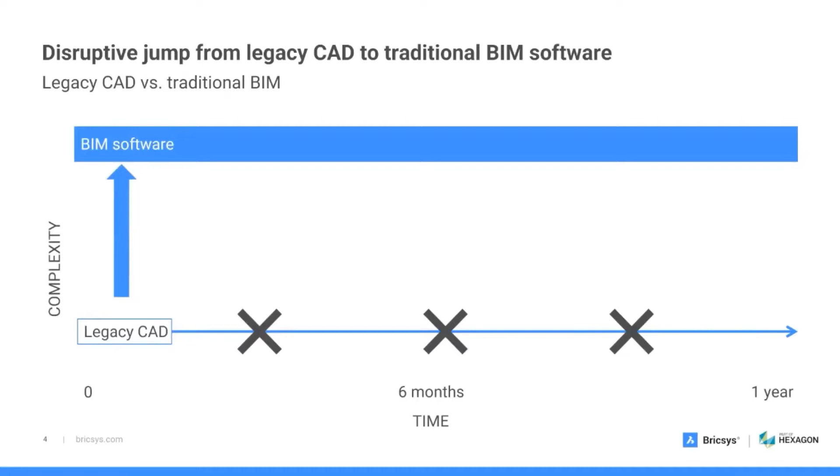So, moving from CAD to a traditional BIM software is quite a disruptive process. So, BIM is a very different system than CAD, so it requires a full 100% conversion. So, all CAD licenses will have to be abandoned, but also all CAD data like template files and so on, built up by the users over many years, will all be lost. So they all have to be recreated manually in the BIM environment.

And since BIM, like these traditional BIM software, is very different from 2D CAD, it often takes 6 to 12 months to truly master it.

So in the meantime, they lose productivity in the first 6 months while everyone is trying to make the transition. And we often see that companies then quit in an early stage, but then all investment costs are lost, and then they fall back to CAD.

And that's quite a shame, because as we will show later on in our demo together with Vrex, BIM workflows can really help to detect problems early in the design phase and avoid problems later on during the construction phase. But then we have to offer those companies an easier transition to BIM so that they can do it at

their own pace and without losing productivity during this transition. And that's what we do with BricsCAD. So in our BricsCAD portfolio, 2D, 3D, and BIM are in the same CAD system and can be used together. So you can reuse all your CAD data

and avoid this drop in productivity. And companies can then gradually make the transition from 2D to 3D and BIM and more advanced workflows based on that, so at their own pace. So you get more productivity step by step, without having this disruption to your productivity.

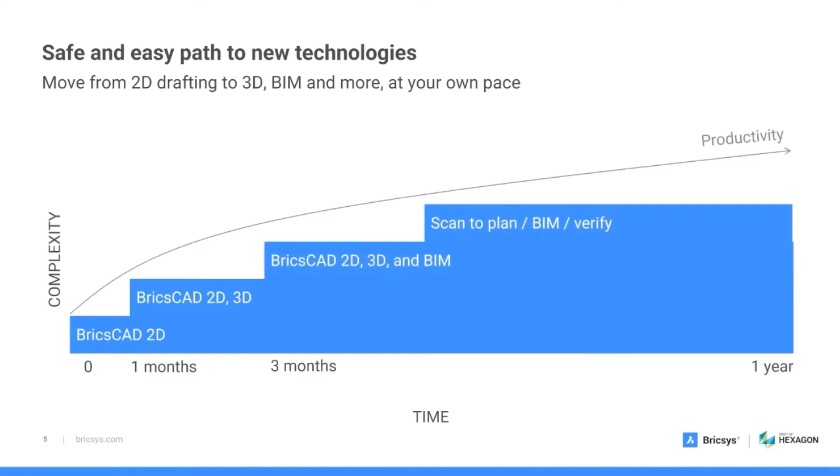Now, a full overview of what BricsCAD BIM is capable of would, of course, take us way too far. So I would like to focus on how we approach design, coordination, and openBIM.

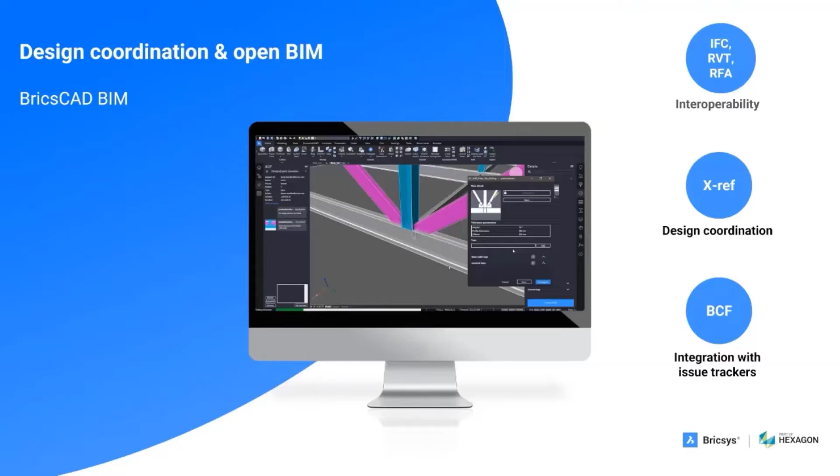Now, openBIM and vendor-neutral collaboration have been at the center of the BricsCAD philosophy from the very beginning. So Bricsys, as you might know, is a founding member of ODA, which is the Open Design Alliance, which has enabled the use of this industry standard DWG file format across different authoring tools.

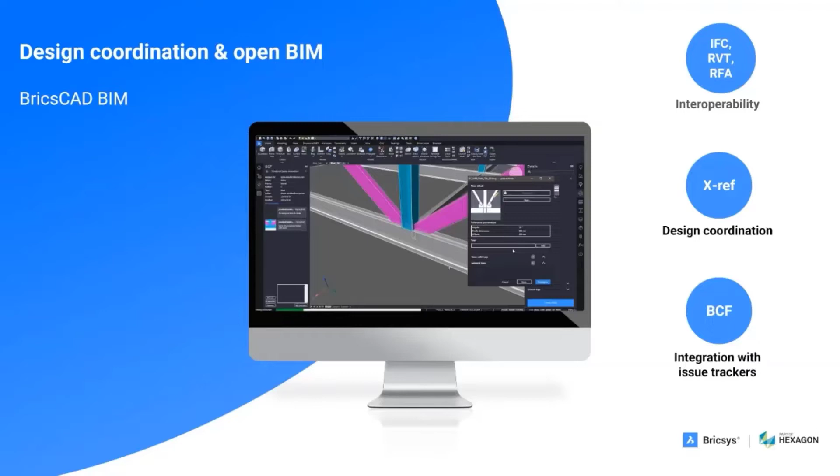But on top of that, we also offer IFC import, export. We offer RVT import, RFA import. We also natively support BCF.

And we have implemented openBIM quite differently than many other tools. So here are the openBIM design principles that we've used while implementing openBIM. So first of all, we align our design workflow to the openBIM principles from the very start.

So for us, IFC is more than just this export that you do at the end. Our internal data and classification structure is fully aligned to the IFC structure from the very beginning when you start modeling in BricsCAD BIM.

Some still see IFC as this static format for archiving or referencing projects, but we see IFC really as a building model exchange standard. So you should be able to work with IFC models the way you work with natively created models.

We automate as much as possible, so openBIM should not be a hassle. And with our AI machine learning tools, you can automatically classify your building elements according to the IFC classification structure.

And finally, so we offer natively this BCF support. So we have a built-in BCF panel.

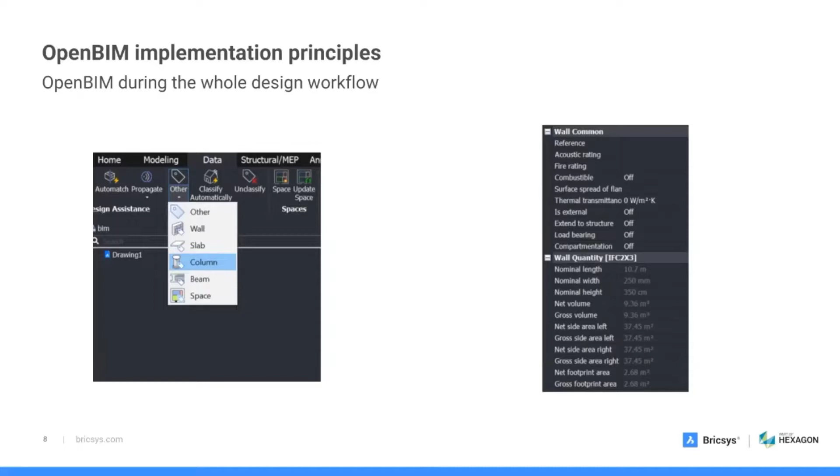So what you see in BricsCAD is what you get in IFC.

So again, IFC is still often used just as a reference or for coordination, like an architecture model that is used as a reference for an MEP model or for clash detection and so on. But we want to make it possible to use IFC for design transfer as well.

And we make that possible with our IFC import. So when importing an IFC model, all elements are imported as native BricsCAD BIM entities, which has, of course, many advantages. So you can just continue designing, adding data, using all the automation tools that are available in BricsCAD BIM, generate construction documentation, and so on.

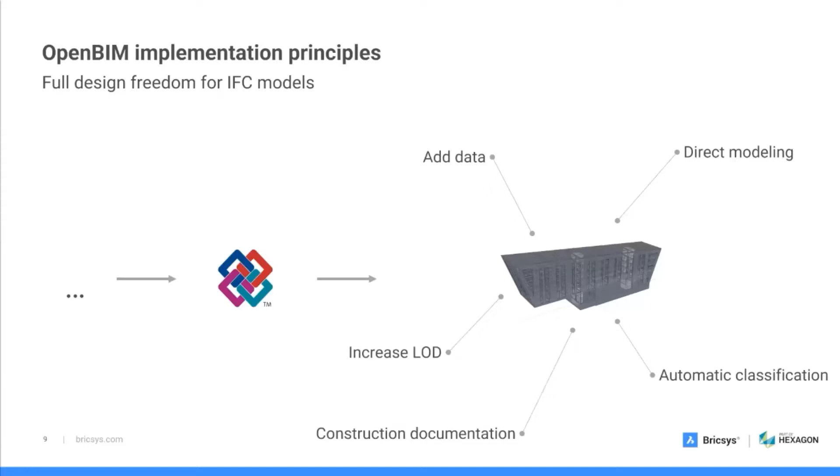BCF, as most of you know, is the openBIM format for exchanging issues and communicating with other project team members. Now we offer BCF support built in, so we have a BCF panel inside BricsCAD BIM, in which you can read BCF files, but also directly connect with the API to cloud BCF services like BIMsync, BIMtrack, BIMcollab, without needing to install any plugins for these specific platforms.

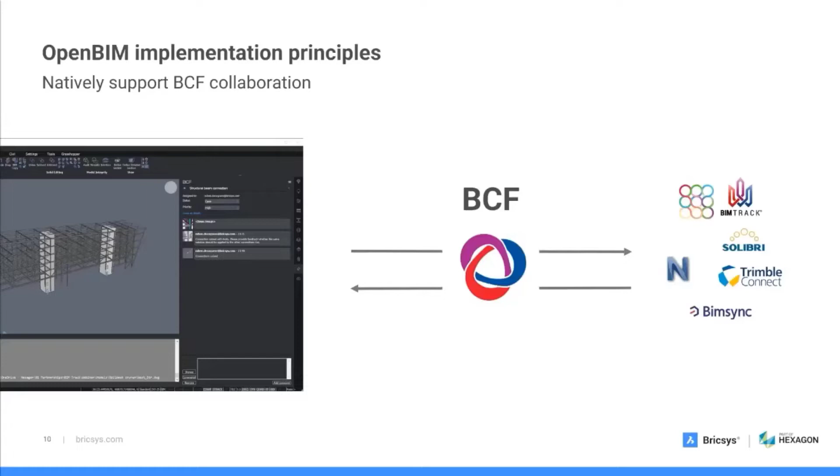Our focus on openBIM is paying off, and today you will clearly see that in the demo later on, where we show the integration with Vrex. The whole workflow is fully based on openBIM, using IFC and BCF standards to integrate with the Vrex Virtual Reality platform. The model created in BricsCAD BIM gets exported easily to IFC and imported in Vrex. Then in Vrex, you can create BCF issues and either transfer them to BricsCAD as a BCF file and open them in the BCF panel, or use the BCF API and connect to one of the BCF services like BIMtrack, BIMcollab, and so on. Investing in this openBIM support really pays off to easily integrate with a tool like Vrex.

Okay, I will now pass over to Rune and Chris from Vrex.

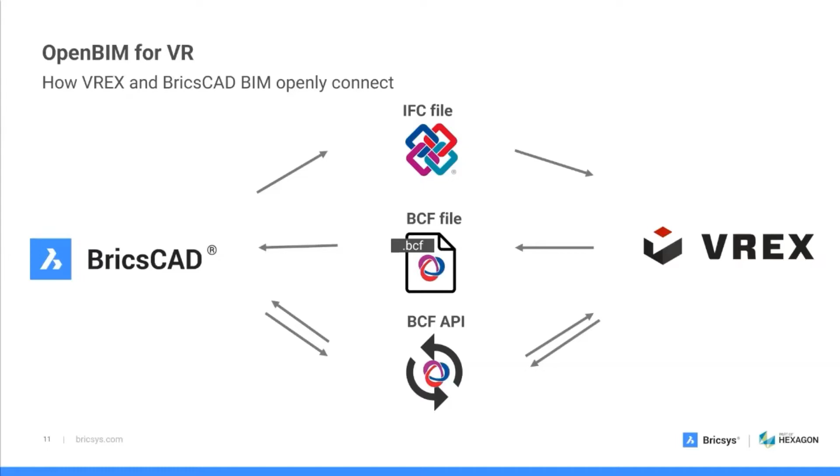Before we head over to VR, we want to give you a bit of background information about Vrex. Vrex is used throughout the world and is supported in multiple languages. Our headquarters is in Norway, and we have partners throughout the world to support our customers. Our customers range from building owners, designers, consulting teams, as well as contractors. Vrex is used on projects of all sizes and all types, including commercial, government, and industrial sectors of the construction industry.

Our core mission at Vrex is to allow all project stakeholders to step into the 3D model. Everyone can experience BIM together, live, and at the same time, either in VR or by watching on our desktop viewer on their computers. Vrex enables you to resolve complex issues as a team and prevent costly rework downstream.

Using the IFC and BCF, or BIM Collaboration Format, buildingSMART and openBIM has enabled Vrex and BricsCAD to seamlessly exchange models and issues together. In addition to BIM, laser scanning and reviewing point clouds for as-built conditions is becoming common practice on projects. Vrex allows stakeholders that can't go out to the job site to overlay and visualize point cloud scans together with BIM in a life-size environment.

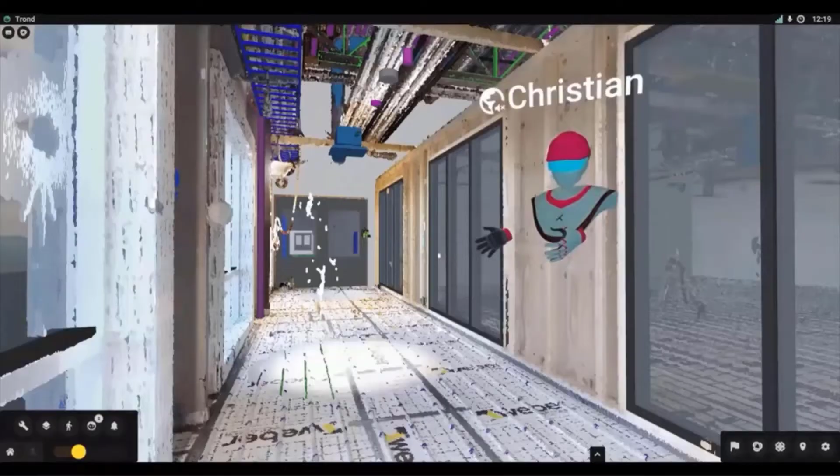Alright, so now Rune and I are going to go ahead and put on our VR headsets and do a live demonstration of Vrex. We're going to be reviewing the project at the same time, but Rune is going to be in Norway and I am in the United States.

All right, so Rune, we're both here in VR. Would you mind coming over onto this side? Basically what I'm going to do is show you something here related to this cantilever. See this, basically this side of the building is cantilevering over with no underlying support. So I want to take a look at the structural for this.

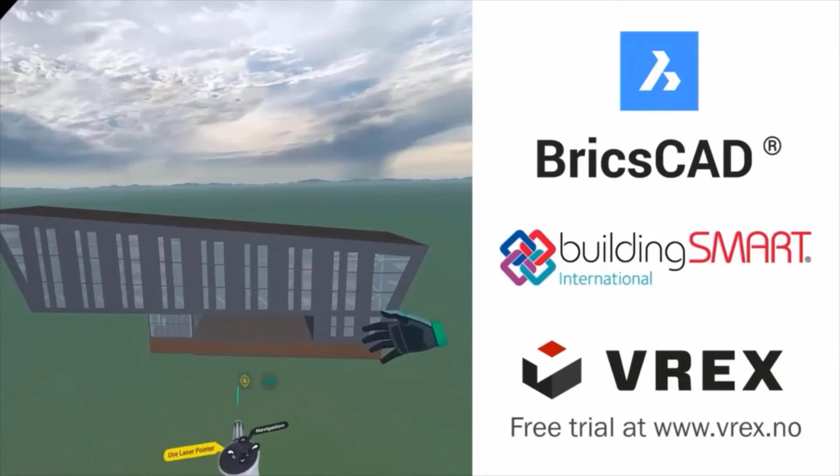Yep, exactly, that spot right there. So I'm going to turn off the architectural, and now we're looking at the structural, and I can actually see that there's a truss system here that the engineer has done. So what I need to do is, let me go to red lines. We just need to basically talk with the engineer and then the construction team about how they're going to actually fabricate and splice those trusses.

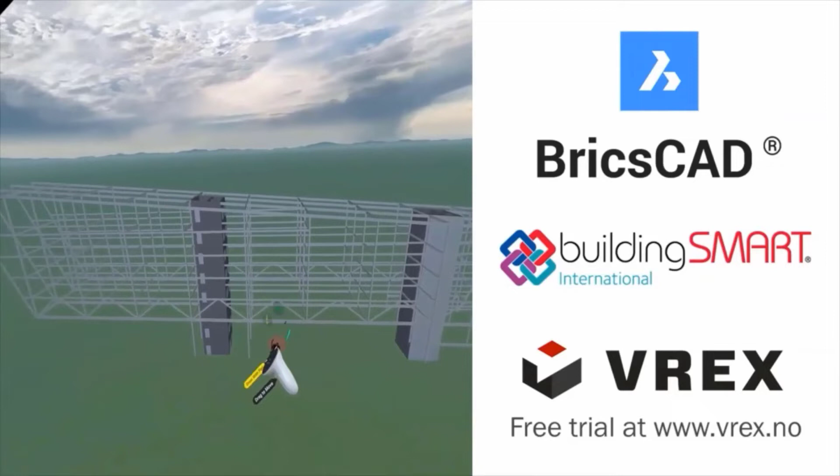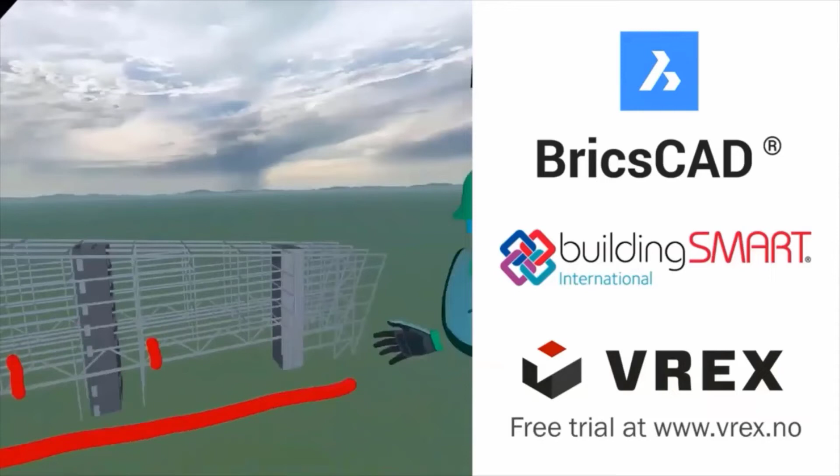And I feel like we're going to need to do construction essentially in this direction here, so that way we have a lot of the back span structural steel basically in place. Then we just need to figure out where essentially the trusses are going to be spliced, and where we're going to have our cranes. We'll need to talk about and see what sort of space there is on site for crawler cranes versus tower cranes. And then we'll just need to evaluate the pick for the cranes, and see if we need two cranes to lift the truss pieces or not.

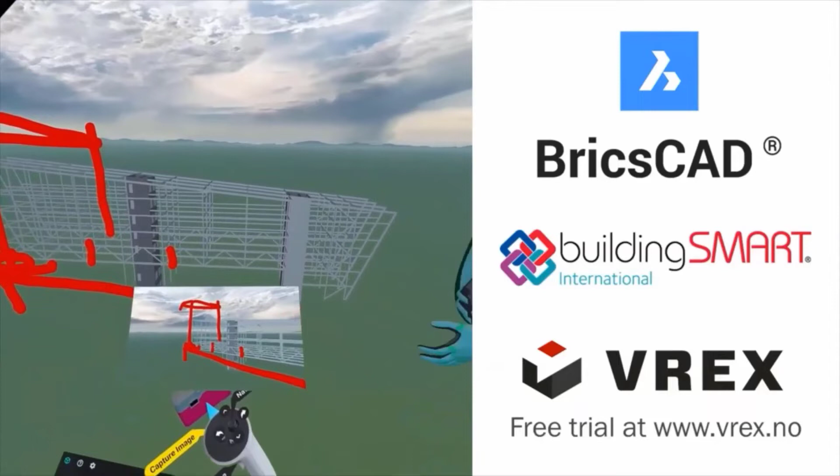And then basically look at how that core is going to be done in the middle there. So let me take a picture. Then I'll schedule a meeting with the construction team so we can take a look at this and talk about it a little bit further. And then let's just clear out the red lines, turn the model back on. I'm going to go ahead and go into one-to-one mode here, or full life-size mode.

Yep, I see you there.

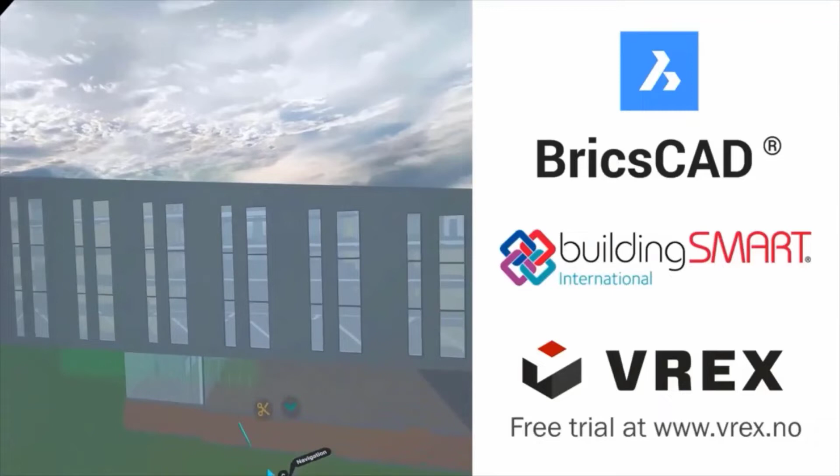All right, so now what I'm going to do is explain building sections using clipping. What's great about this is if I click on a surface here on the building, and navigate forward to get a little closer, I can hold down the trigger and move this clipping plane, and here I basically have a 3D building section of my project.

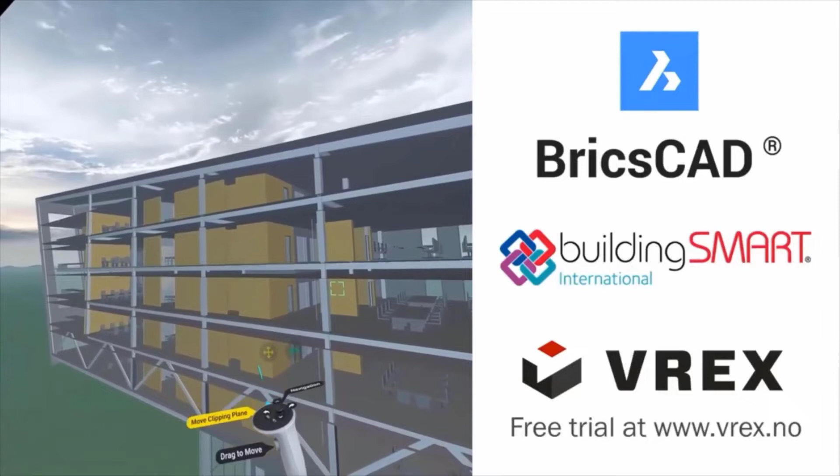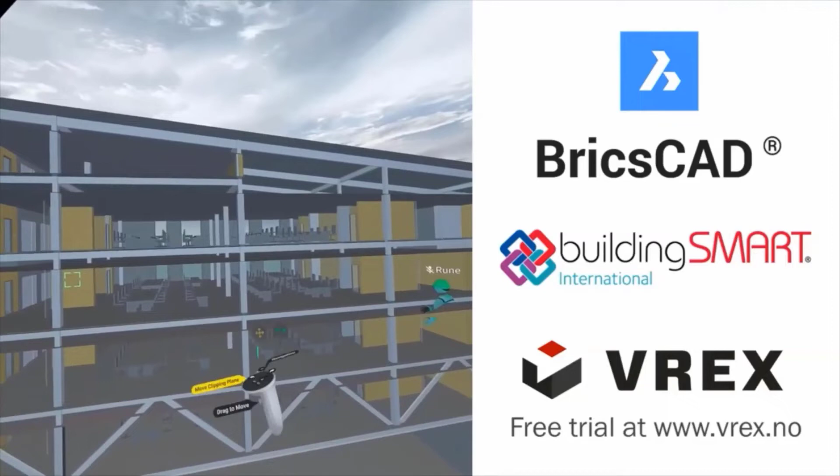You'll see on architectural drawings building sections are often cut at different locations to give you a map of the interior of the building. Here in VR, this is accentuated to another level. I can really see how each of the building systems work from floor to floor, especially with MEP shafts and where things transfer from floor to floor. I can see the consistency and layout from one area to another, and how the structural fits in the ceiling space. So it takes building sections to another level.

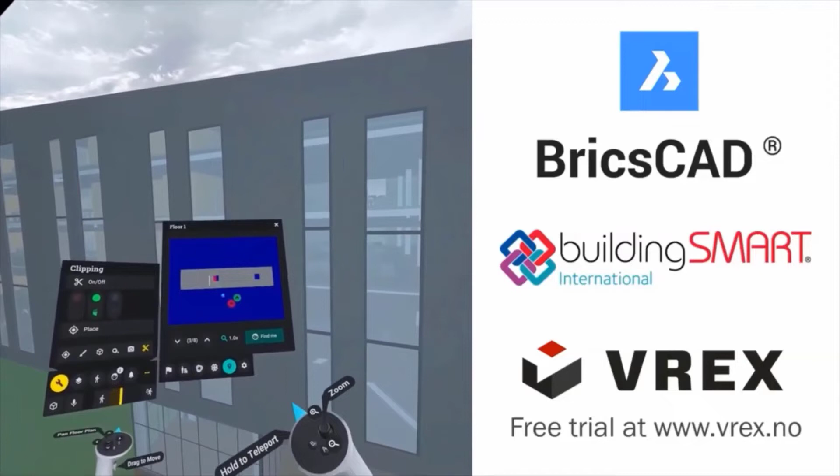I'm going to go ahead and remove the clipping plane. What we can also do is go to the floor plans. This is another way for us to navigate. You can see where Rune and I are here with our icons in the site plan, and we can just go floor to floor. Let's say here on floor number 3, I'll just click us into the building.

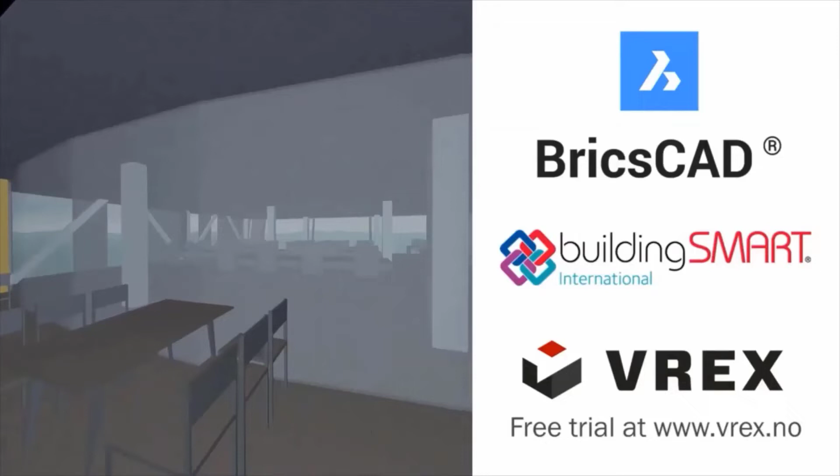Okay, so now we're teleported onto the 3rd floor, and we're life size. I can get a full feel and experience the model. I can actually just walk over here.

The first thing I want to take a look at is how this structural is lined up with the architectural space. This feels a bit tight to me, and looking at this from a headroom clearance and safety point of view, I want to make sure the architect and the owner are good with this. I'm going to go ahead and walk through here.

So Rune, does this look a bit tight right here? Do I look tight in this space when I'm walking through it? Yeah, it looks like you're walking through a slightly narrow door. Okay.

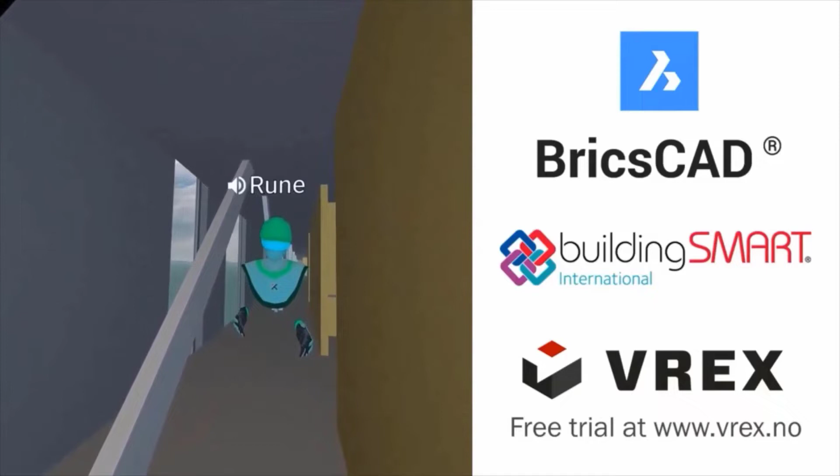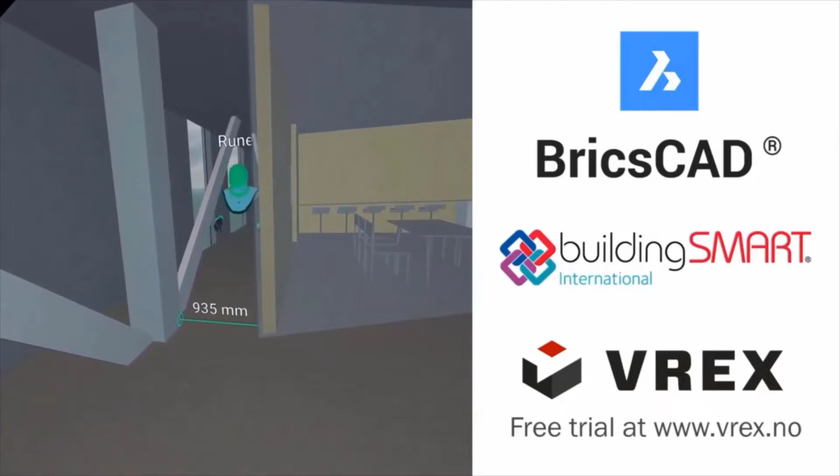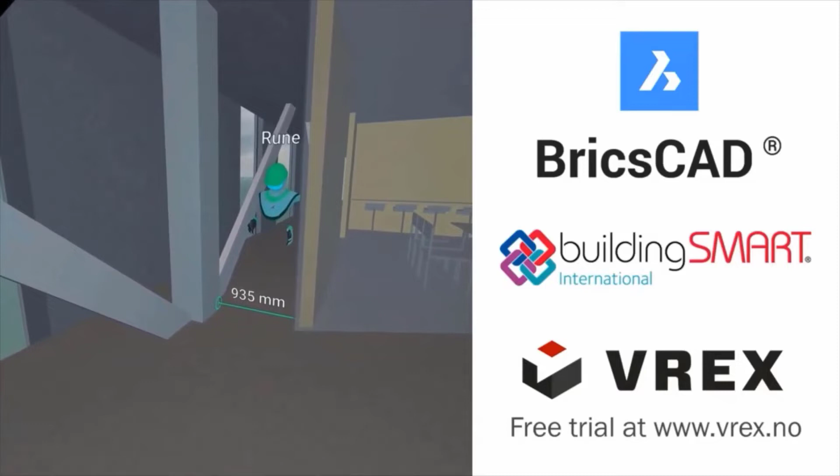Would you mind taking a measurement of that real quick? Okay, so it's a little bit under a meter there, from the clear face on the wall. I want to go ahead and talk with the owner and the architect. We'll get on a session with them and review this, and maybe we'll make an issue out of this later to verify.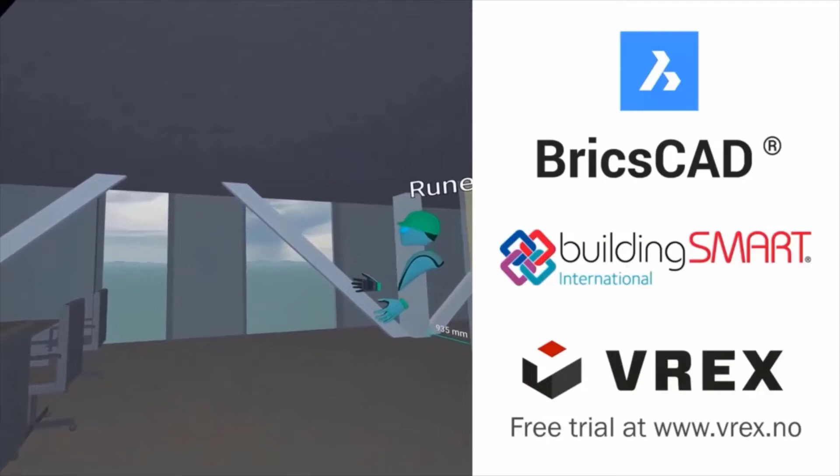This is a really good example on this level here. Just walking over to the middle of the space so I can get a feel for it. This level is a bit unique because we've got these truss web members or bracing members, and I'm looking at how this affects, exactly where you were pointing there, and how that impacts the visibility out the windows.

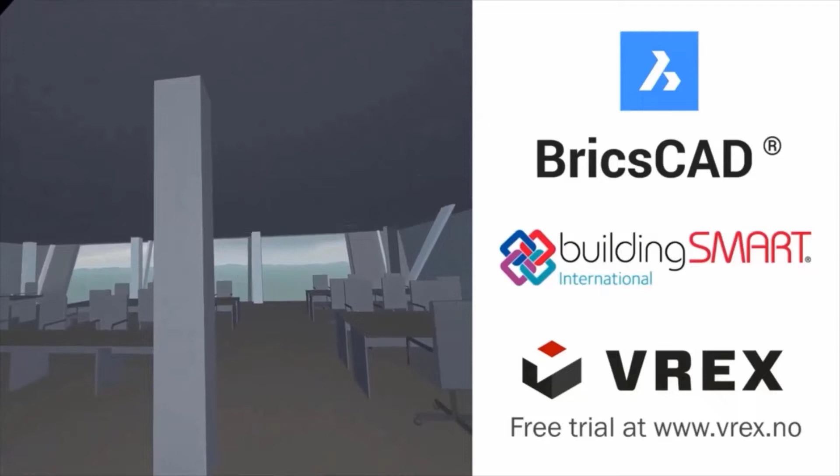I'm also looking at the column placement here relative to the window panels, and making sure that's all nice and symmetrical between the window manufacturer and the structural, so that it aesthetically looks good. It'll probably be good to bring the architect and the engineer into this space and make sure everything from a visibility point of view and safety protocol is all good.

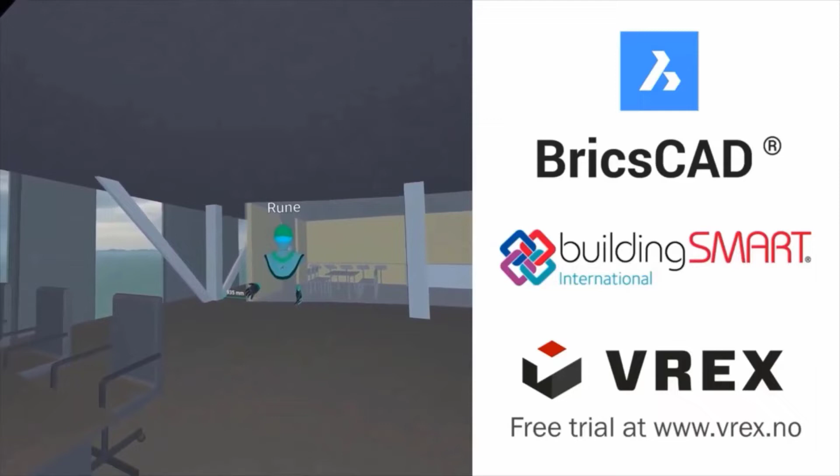Did you say you had some issues down in the basement related to MEP that you wanted to show me? Do you mind taking us down there? Yeah, I'll open that up.

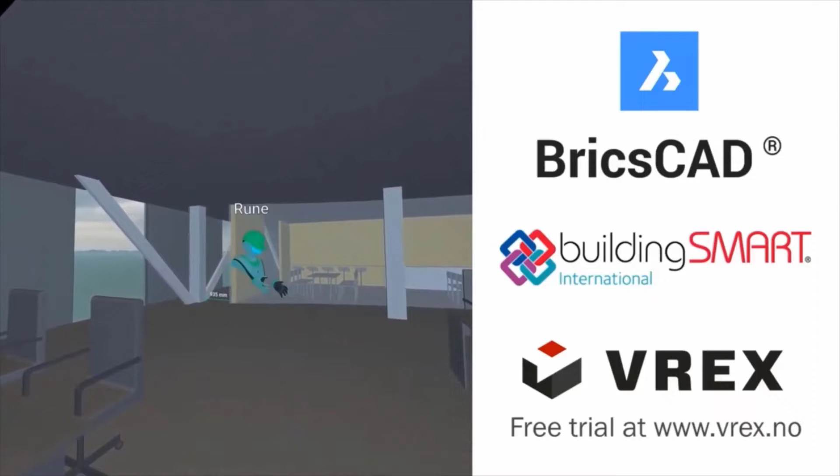Yeah, so I want to go over a couple of issues down here. One of them is the water pipes. Looks like they're trying to turn to avoid the ventilation, but they're turning a bit too early. So I want to make a note of that and bring it back to the modelers.

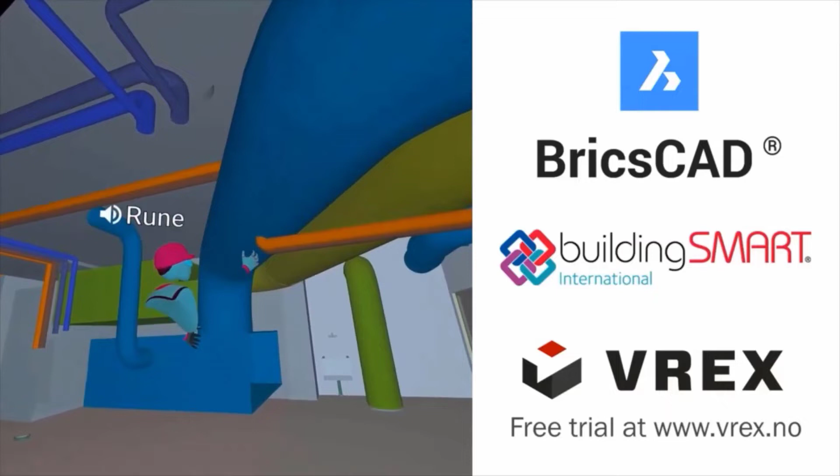So if you instead go over like this and go up there. Oh yeah, I can see the clear clash. Fine, yep, okay. So I'll just take a picture of that.

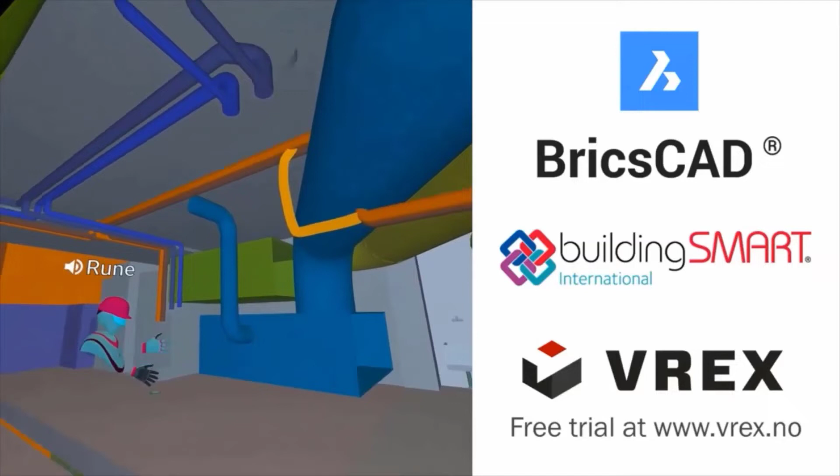The second issue I want to have a look at is the ventilation in front of the door. I know that this room will be doubling as a storage room for maintenance, and there's some big equipment going in here. It looks like it's going to be a bit tight getting past that door.

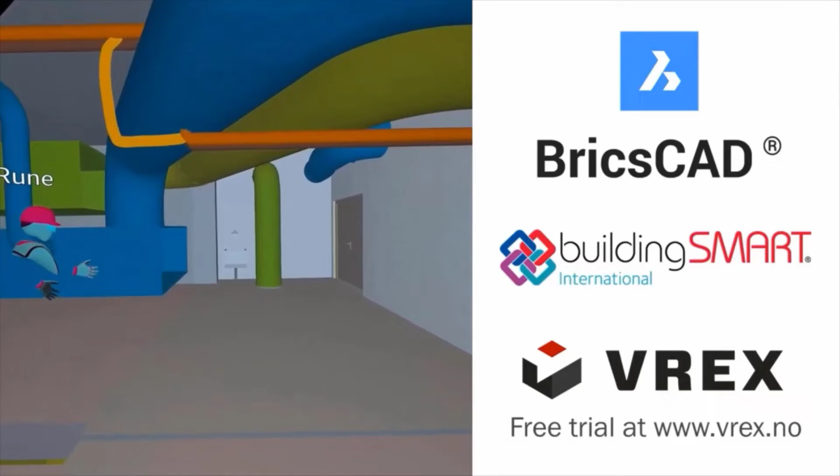About almost 2 meters. Then we have the front there.

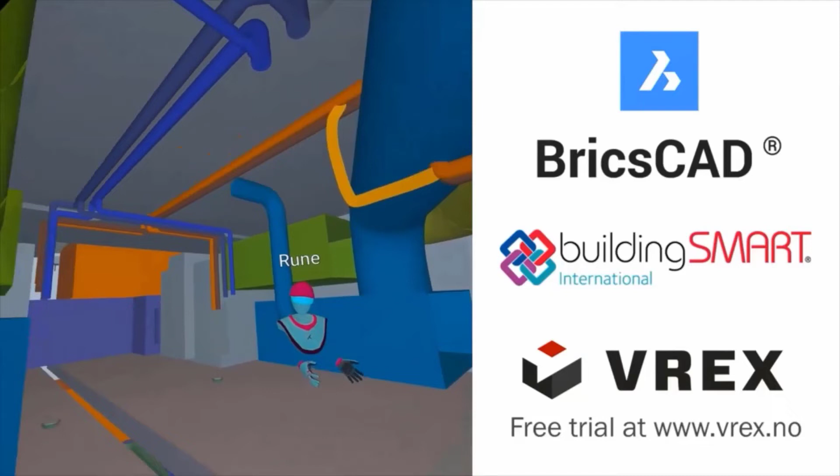The dimensions really help us see quickly that there is a potential access issue there. When we're down here like this, of course you can see this looking at the BIM model on your computer screen, and you can have soft clash areas and reservations around equipment.

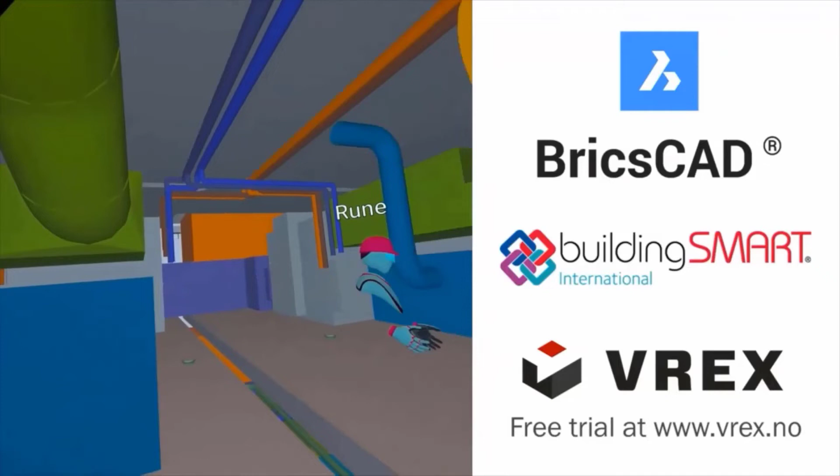But acting like I'm actually the maintenance person, putting in all of the equipment and being able to feel it life size with everything in here, I can see all sorts of access issues, especially from a maintenance point of view. Once facilities actually start operating, this is just really powerful.

So I'll just make a red line of this, suggesting to move this slightly back. Make a picture of that.

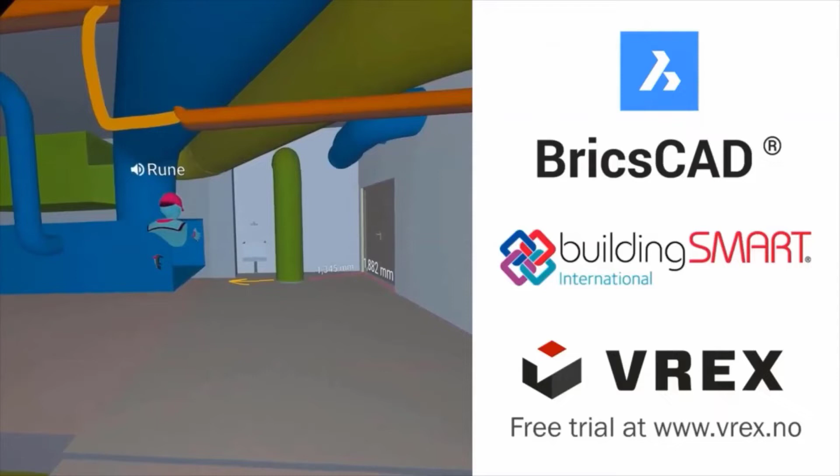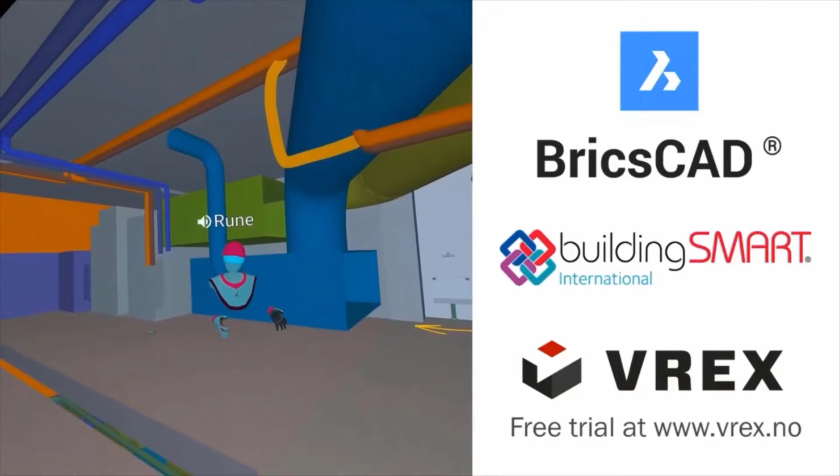I think that gives a pretty good overview of what Vrex and Virtual Reality does, allowing us and multiple project stakeholders to essentially collaborate at the same time. You're in Norway, I'm in the US, and right now we're live here in what is as close to being the real building as possible. It's pretty amazing.

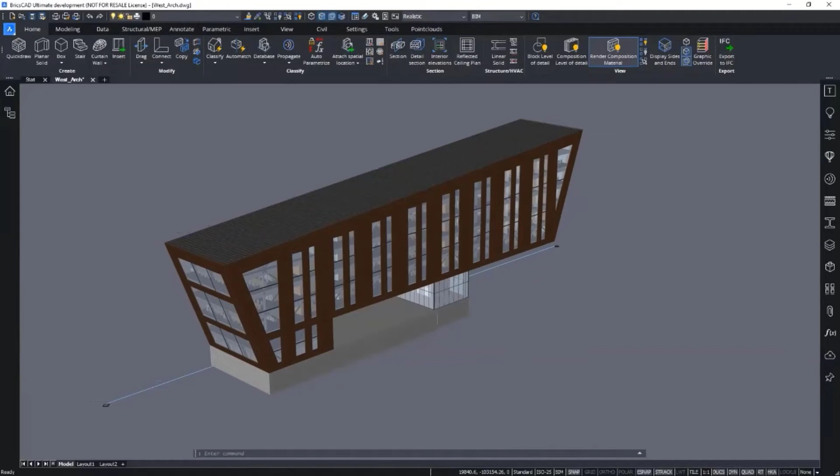All right, so now we're going to go ahead and show you a live workflow between both BricsCAD and Vrex using openBIM. Let's dive in and see how this workflow looks.

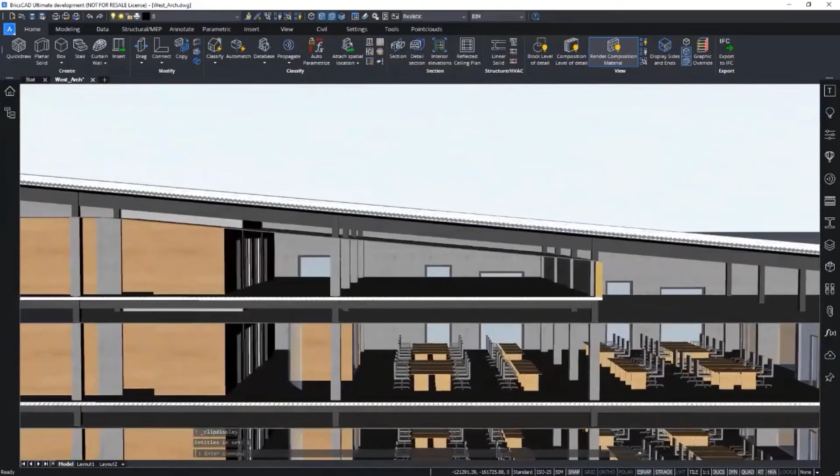So we start in BricsCAD BIM. Here we have our office building. There are two models in here, the architectural model and the structural model added as an XREF. We export to IFC.

In this case, we will take IFC 2x3. We save, and then we go to Vrex.

The first thing you do is go to the Vrex admin website. Then you choose to upload your models, and add the files that you exported from BricsCAD. Once they are uploaded, they are processed and automatically available for a virtual reality meeting.

Then you go over to the virtual reality meeting application. You open that up, search for your project, and then you open that project. You type your name, set your audio settings, and then you enter into VR.

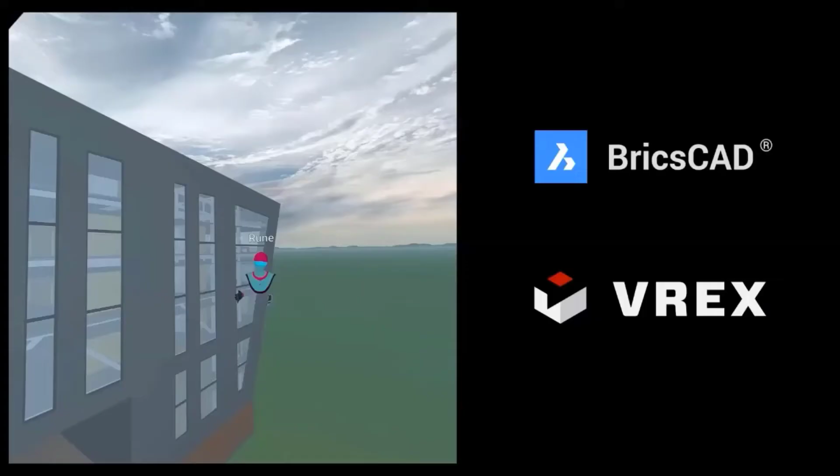Here you see me and Chris decided to meet inside a model. We will go to an area where we think there are some problems in the model. So we are walking through the model together until we locate something that is problematic.

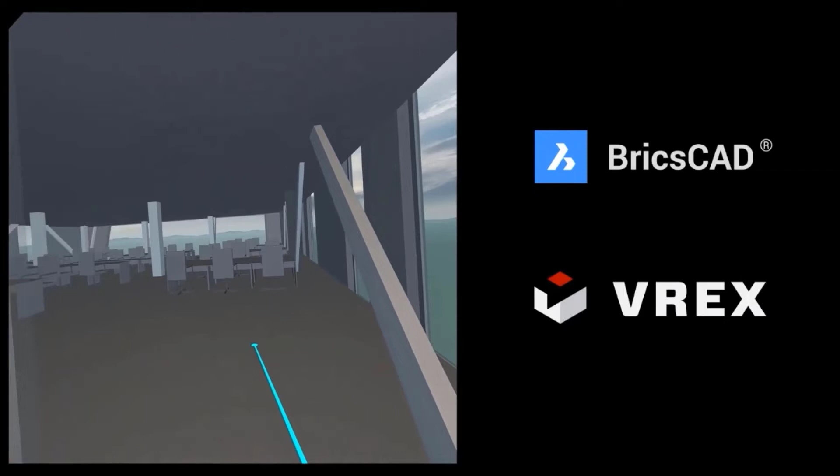In this case, it seems like the column and the wall is slightly narrow for walking through it. We decide to make a measurement there to check the width, and it's less than a meter. So Chris decides to make an issue out of this and opens up the issue creation guide.

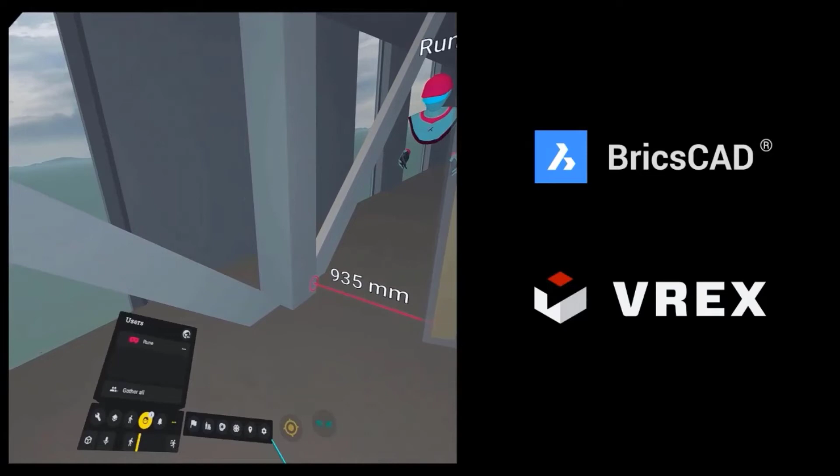This is made so that anyone should be able to make an issue, even if they don't know what a BCF is. He takes a picture, and then highlights the objects that are related to that issue. Having those objects attached to the issue makes it very easy when you get back into BricsCAD to see which objects are related to that issue.

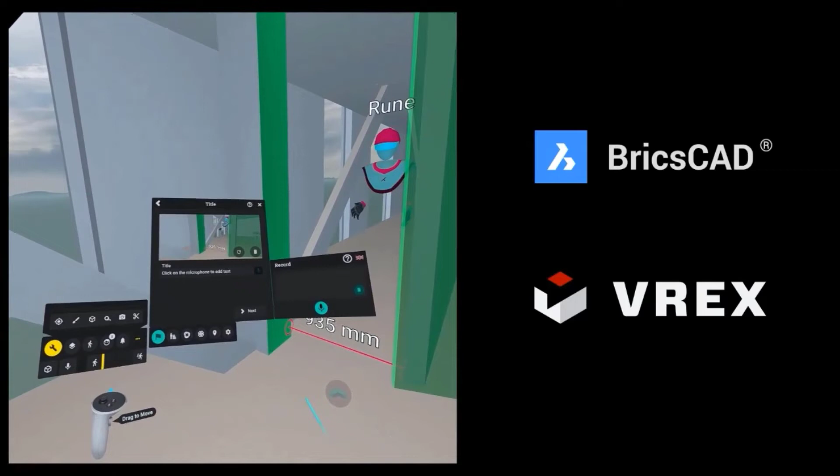Using voice to text, he gives the issue a title, then adds a description to it. Status and type is fine as it is. Then he saves that, and it's ready to be taken back into BricsCAD.

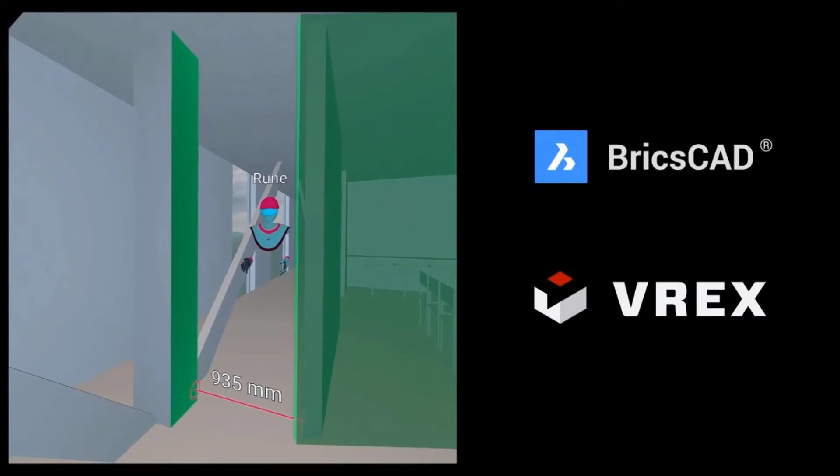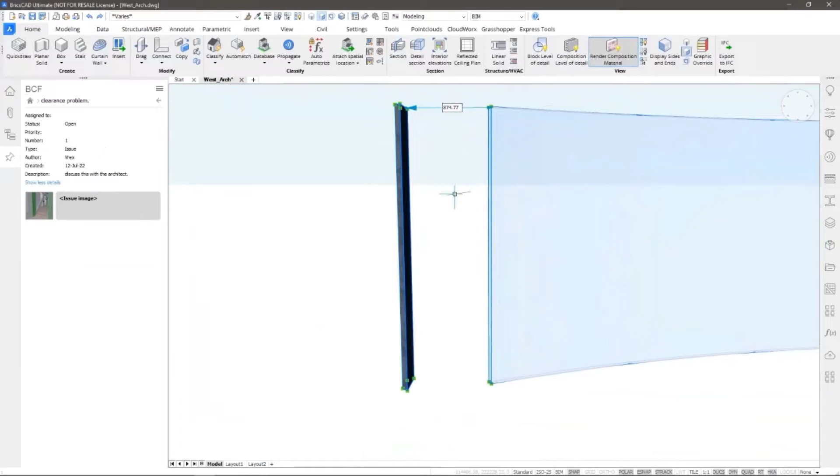So now we are back in BricsCAD BIM. We go to our built-in BCF panel, where we open the BCF file that was sent to us. There is one issue in it, and we can see all its details and description. We can click on the screenshot, so it takes us immediately to the exact location in the model where the issue occurs, and shows the relevant entities.

And so we see here as well that the distance is too small, so we need to adapt this. We'll start with making these curved interior walls smaller.

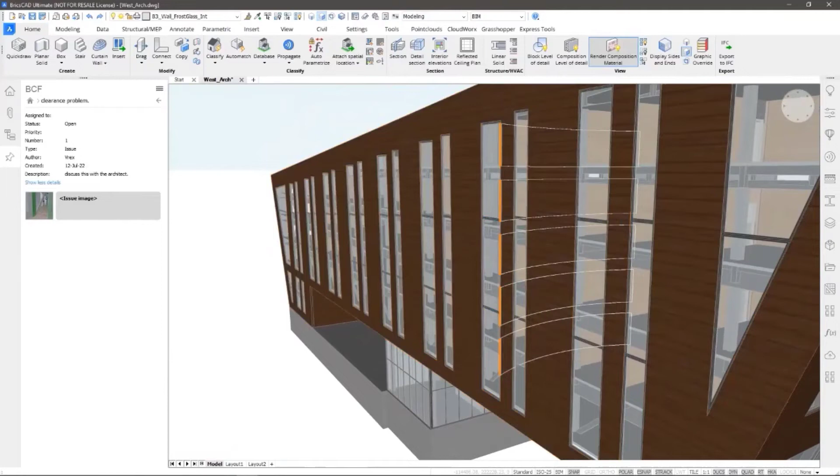But of course this issue does not only occur on this lower floor, but also on the floors above. So we let BricsCAD automatically detect the other walls that have an aligned face, so we can apply the change on all floors at once. And then we push-pull to make it smaller.

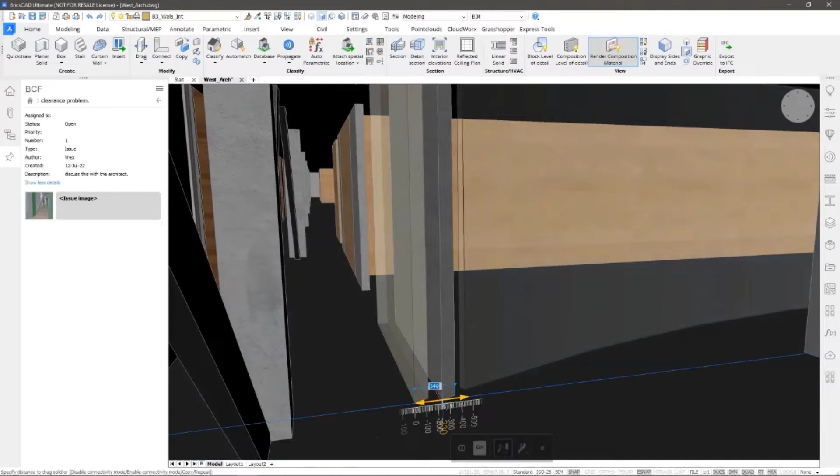And now we have to move these interior walls to the right. But here again, there are many walls that have the same limited distance to the structural members. So let's search for all aligned walls again and move them all at once.

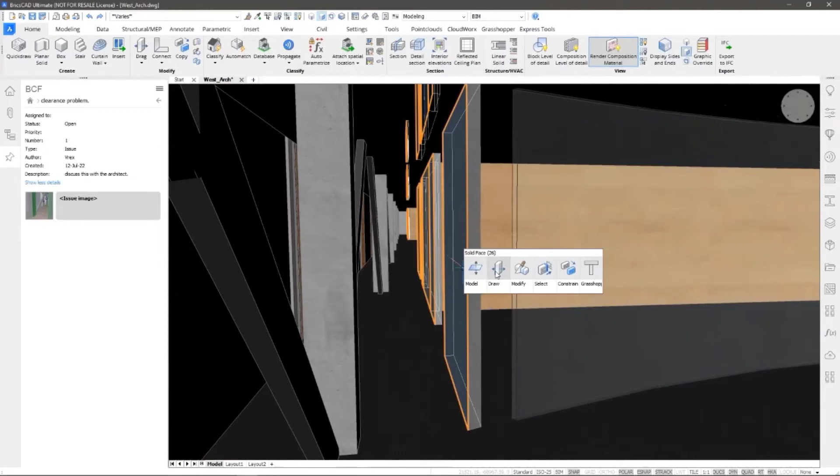Now by default, when dragging the walls, the connectivity with other walls is not kept, as you can see. But we can toggle the connectivity mode on, and so this way the connection with other walls is kept.

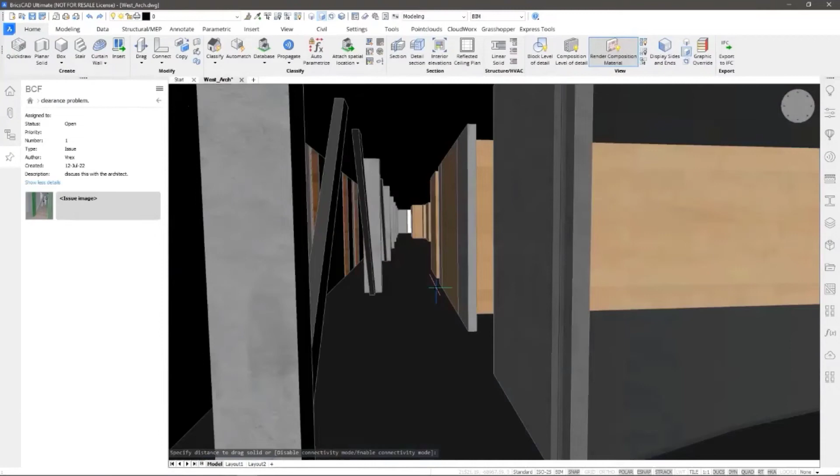So here all connections are kept with the other walls. Now we see that the curved walls are still a bit too big, so we will slice them.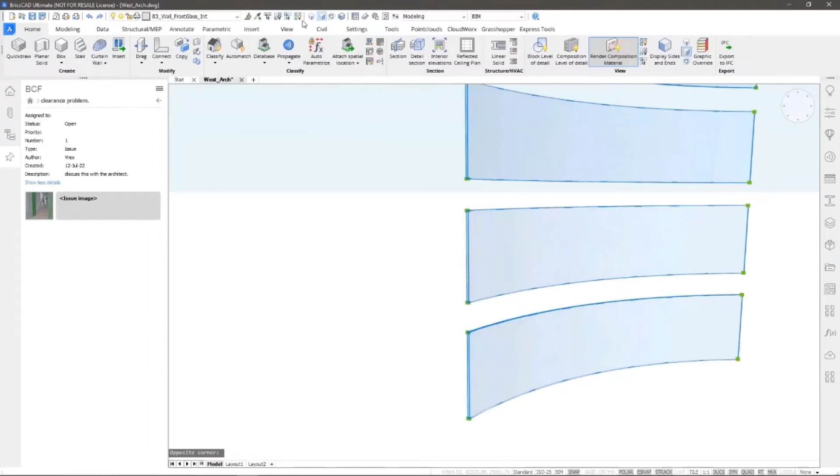Now again, we will do it for all floors at once. And so we select this face of the other interior wall as a slicing plane and remove all the parts that were sliced.

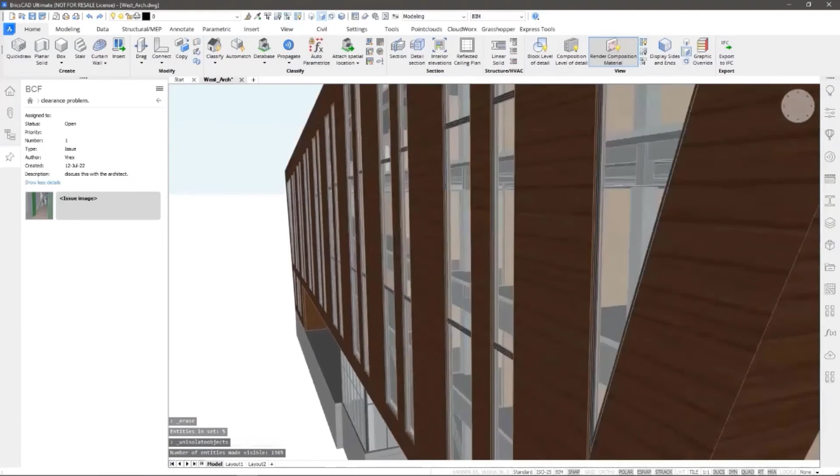And so now if we measure again by simply selecting the entities, we see that now there is enough space, so this issue is resolved.

Apart from the workflow with a BCF file, you can also connect to BCF cloud services like BIMtrack, and that from within the same BCF panel.

So we log in, and then we see all our projects, and in the project we can see all the issues. Here again, when clicking on the issue, we see all details like due date, description, and so on. And we can easily navigate to the location.

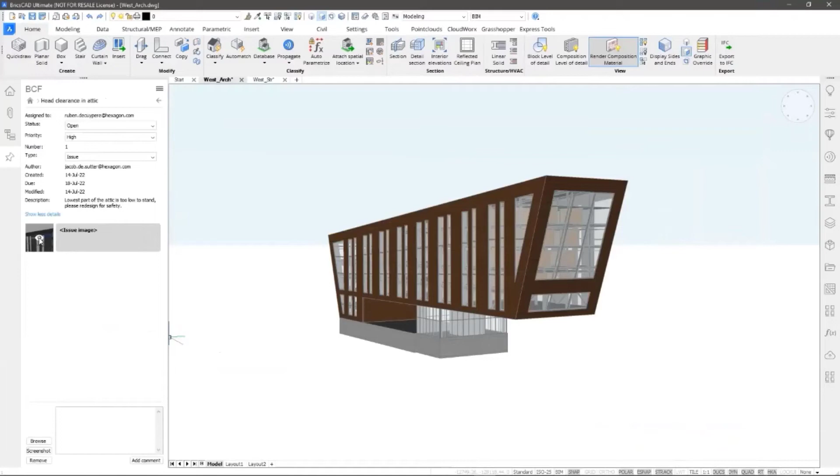And we can indeed see here that the height is too limited to stand. So we'll have to move this wall.

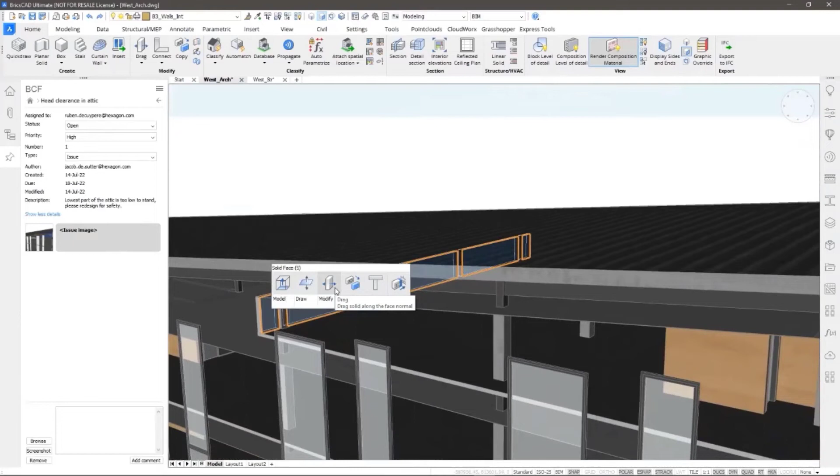But when moving the wall, we can again choose to only move the wall or to also keep the connection with, in this case, the ceiling. We'll move the wall to the next row of columns.

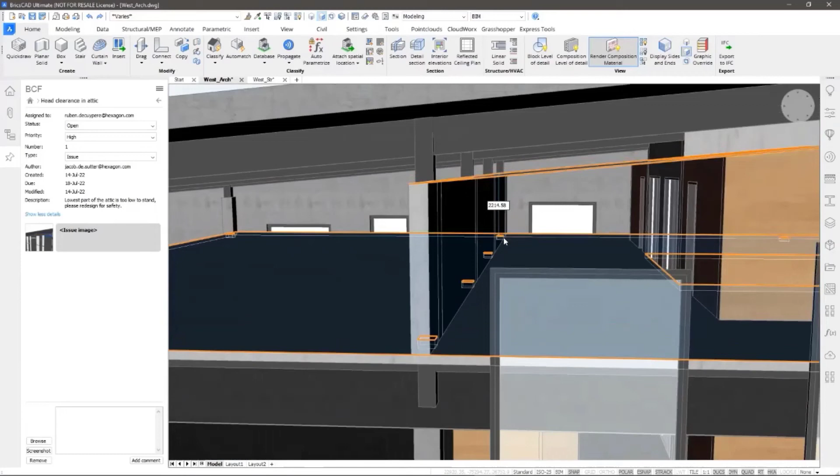And by selecting the floor and ceiling, we immediately see that there is enough head clearance now. So we can add a comment to the issue describing that we made the changes so that this issue can be resolved.

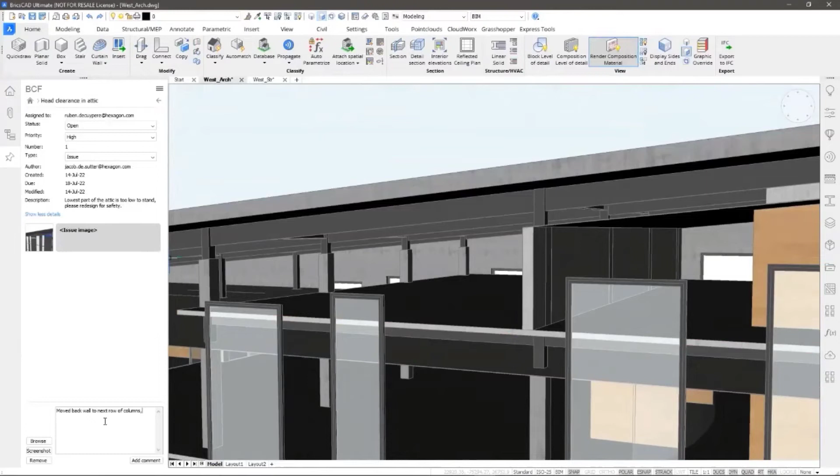We add a screenshot and add the comment to the issue.

Now we will switch to another cloud BCF service, BIM Collab. So we simply log in by providing the URL of BIM Collab.

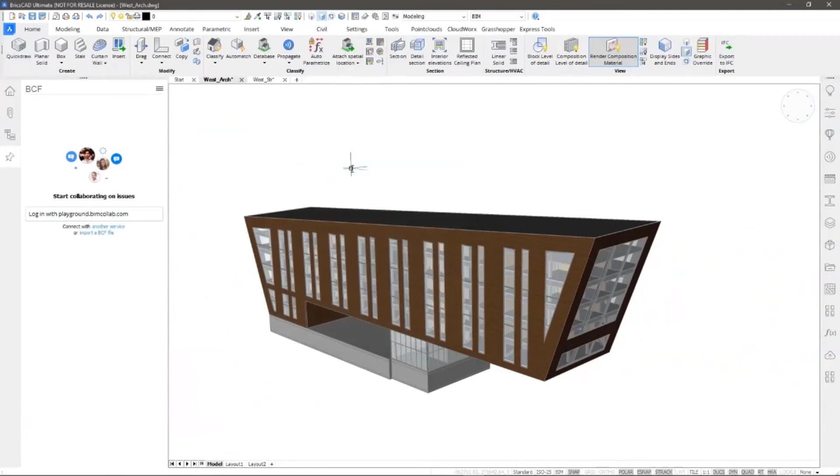And once we are logged in, we can see all projects and the issues in it. We will now resolve an issue related to the structural model.

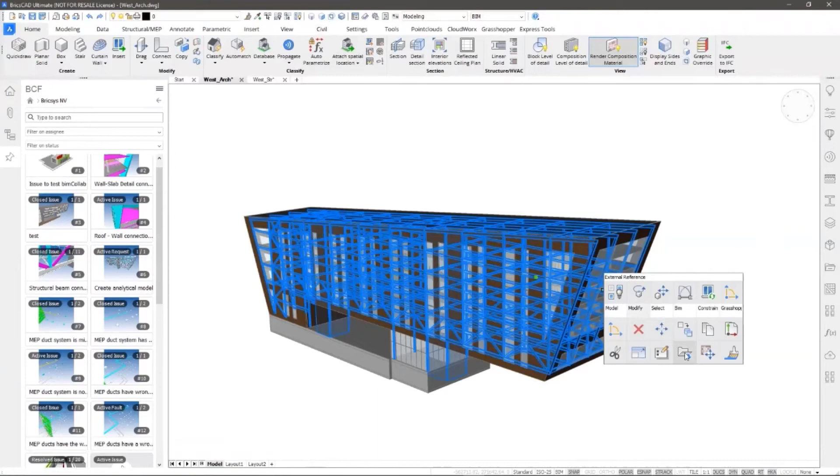As you can see, the structural model is an external reference in the model. So we open the XREF and we can see that the details are not very detailed, so the connections are not very detailed.

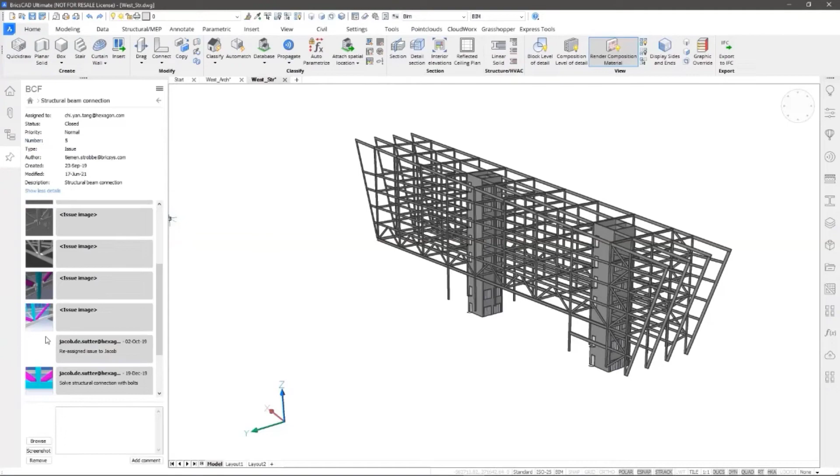Now there is an issue requesting us to solve the structural connections with bolts. To do that, we will go to our details library. And we will look for the right connection detail that we could apply.

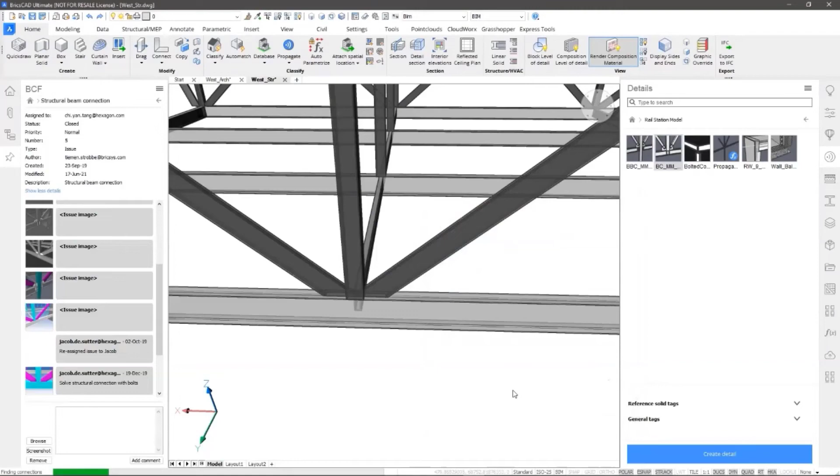Now, of course, there are many places within the model where this detail could be applied. So we use the propagate functionality to automatically scan the model and search for similar connections. And it finds 8 locations where this detail can be applied.

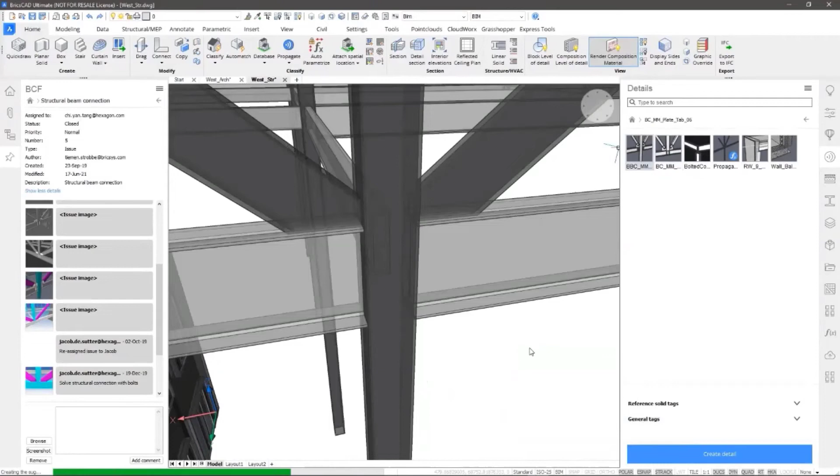So now on all eight locations this detail is applied. For the connections where the column runs to the ground, we need to apply another detail. But again, we use propagate to find all relevant locations within the model. In this case, there are 6.

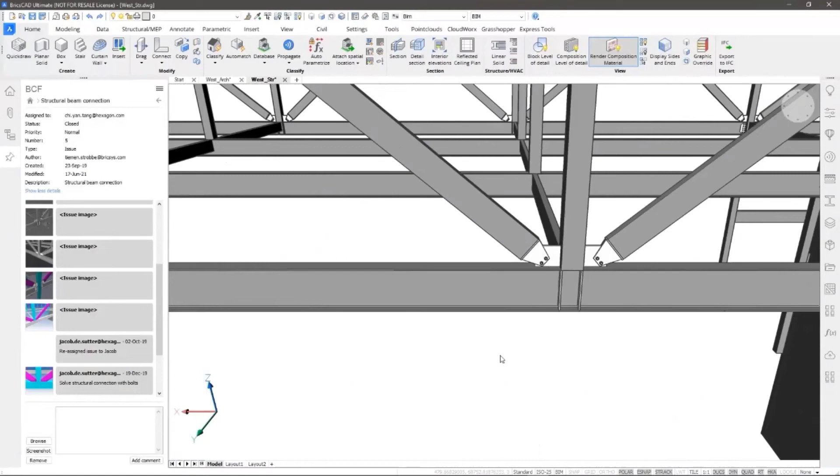And so we have now increased the LOD of the model by automatically applying the detailed connections to the model.

Okay, that's it for the demo. Back to you, Ra.